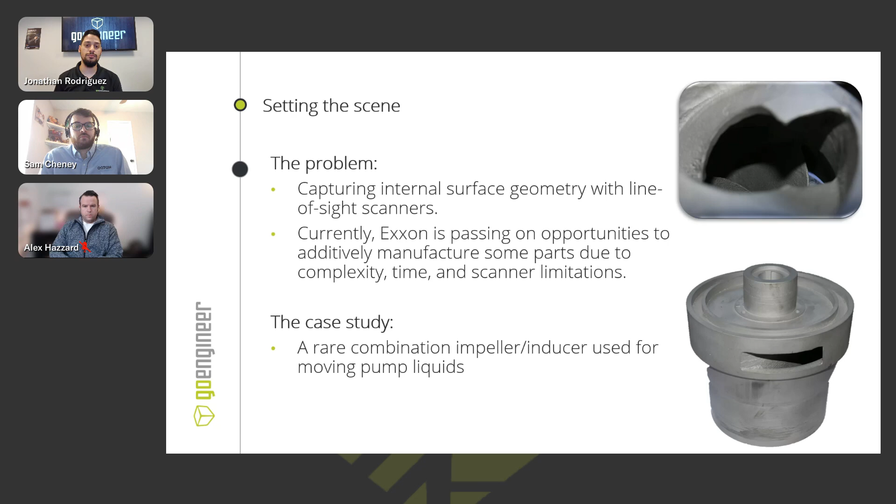Let's see. There we go.

Okay. And as Sam said, there's a few different options for doing something like this. One of them is line of sight scanning. You have a handheld scanner or even something on an arm. It's great for capturing the outer surfaces of the part accurately. You can do it relatively quickly. I think it was probably 30 seconds or so just to scan the outside housing of this, but you're limited to line of sight. So especially with these deep crevices in this impeller/inducer that we couldn't see, we also couldn't scan. The scaling might not have been obvious, but I could barely get my hand in there.

So as we talk about some of the prep work that's involved, this thing is small. There's also possibly using CMM probing. We have a lot of customers that have CMM probes. You still have some of those limitations. It can be a slow process to set up for a part. One of the benefits is if you have the same type of parts, you can set up your program, you can keep running it over and over, and it's great. It does require a bit of skill though. So it's a very accurate solution.

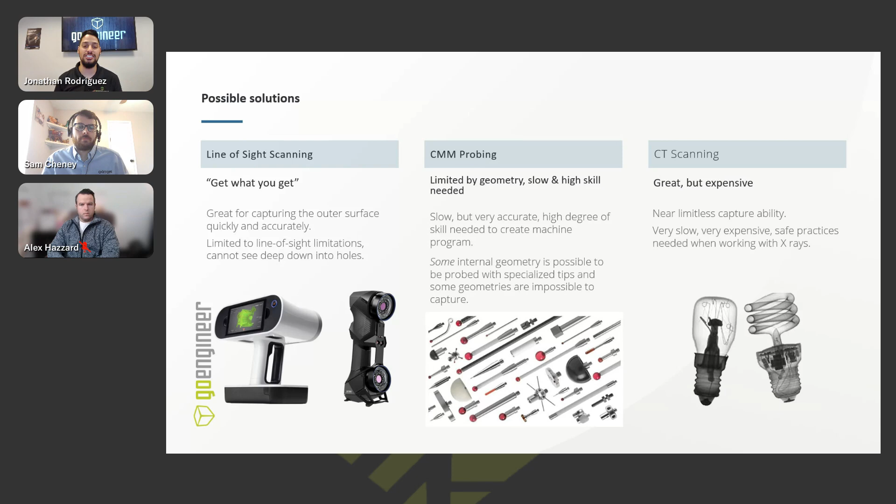There is a degree of skill required, and then the internal geometries are still going to pose an issue. Are we able to get a probe in there? Are we required to get specialized tips to be able to do it? So some of the detail is going to be near impossible to capture. Yeah, while you could do it, these probes are made of ruby last time I checked, so very expensive. Also, no guarantees it will work for the next part that has different internal geometry. So really, it's not a flexible enough solution for us, so that's why it's not the right one.

Yep. And then lastly, CT scanning is a solution that can be great for these types of things, but it is expensive. I don't have one available to me.

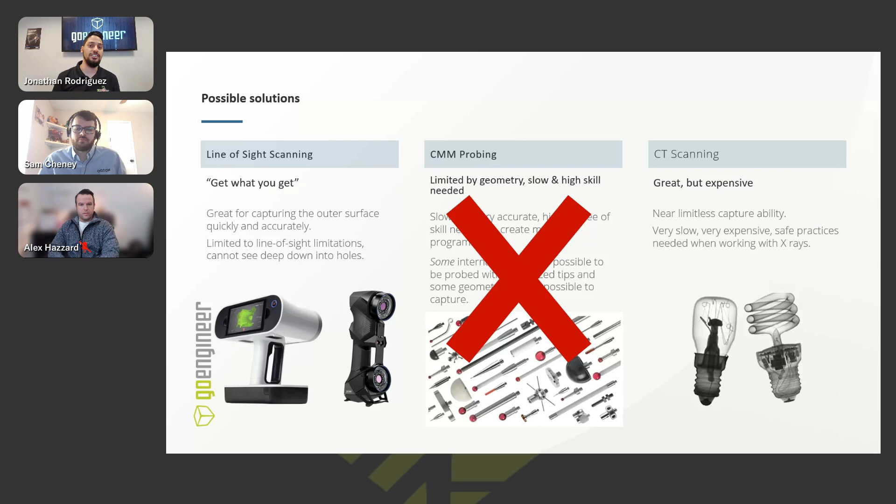Would not be nice. You have a lot of capturability with it, but the expense alone is often enough to turn off our customers or make it really difficult to procure the solution or even just outsource this. It's a slow process. It's expensive. Sam brought up some of the PPE requirements and what you need to do with the room to be able to set this up. So all of that becomes a huge limiting factor.

Yeah, the last possible solution, I was talking to Chris after this, was we could technically section the part, and he said, if you have to, you can section it, but we didn't want to do that. We didn't want to take the easy way out. Obviously, if you have a part that you can destroy by cutting it, then you don't really need to silicone mold it. We're doing this the hard way to hopefully show you how to do it so you can learn from our mistakes, successes, and copy this workflow if you have internal geometry that you can't just hack into. Yeah. If you can cut it, save yourself the headache. Yeah, right. Join us on our journey.

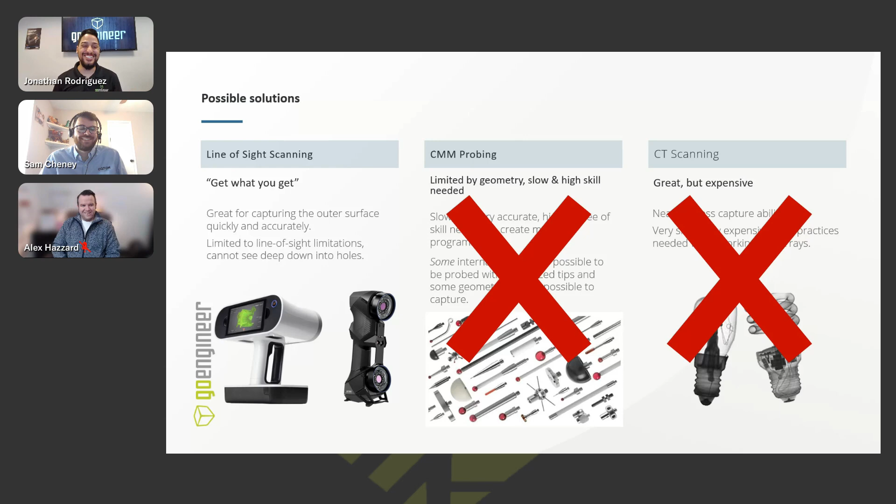So, Sam, this was a great slide that you helped put together when talking with Chris. So what was that conversation? Yes. So I spoke to Chris when we were getting this project started. I wanted to know why; he is the driving force behind this. And he told me a little story. He pulled a bunch of these impeller parts and looked at those 8 in total that they wanted to use for this digital ecosystem, this reverse engineering project. And out of those 8, only 4 of them were able to be successfully scanned with his scanning equipment. The rest had this internal geometry hurdle; you can't get down in there. You can't see what's going on inside it. So 50% of the parts he took aren't even able to be candidates for this digital ecosystem project.

This project is going to be a very large initiative. It's essentially replacing an entire warehouse with a server of digital parts that you can just click on demand and start manufacturing whenever you're ready. This is going to take 6 to 7 engineers per site. And they are going to spend at least 25% of their time, a quarter of their week, scanning, modeling, creating this digital ecosystem to reduce the physical inventory. But if 50% of the parts can't actually be captured, that's leaving a lot of spare parts in inventory, and it's leaving money on the table. So that's why we want to use this silicone molding technique to really get the most out of the scanners, where they potentially haven't been taken before.

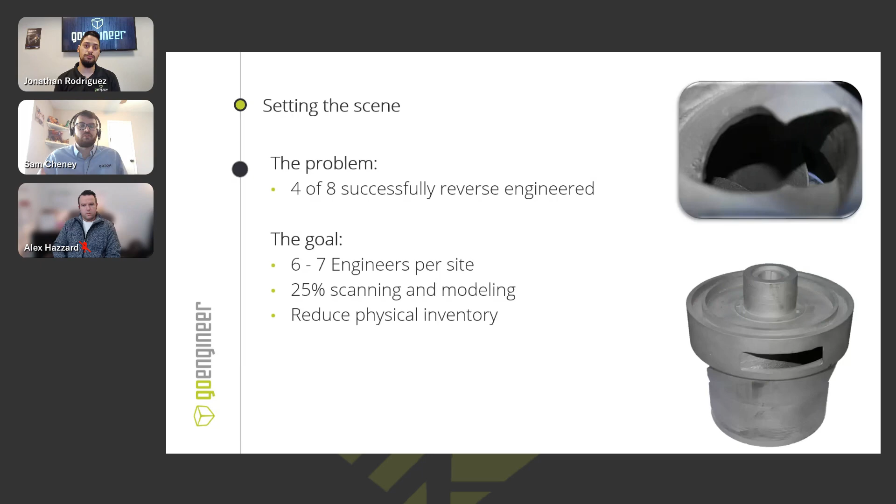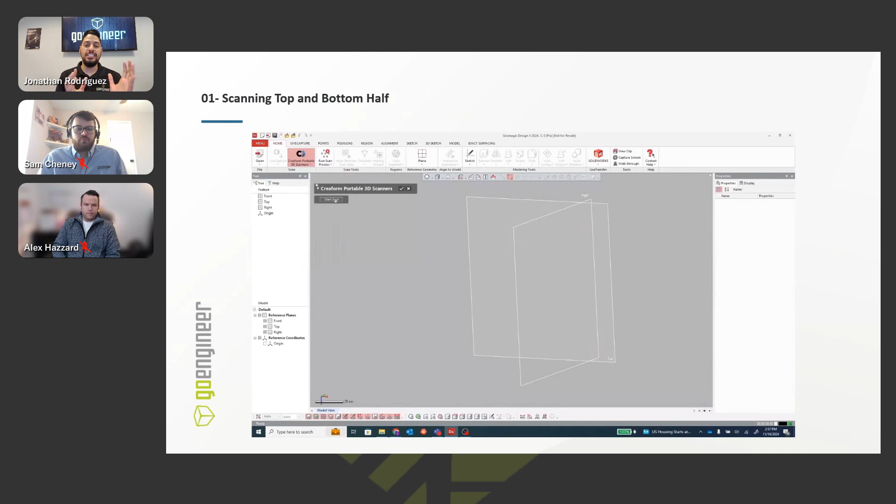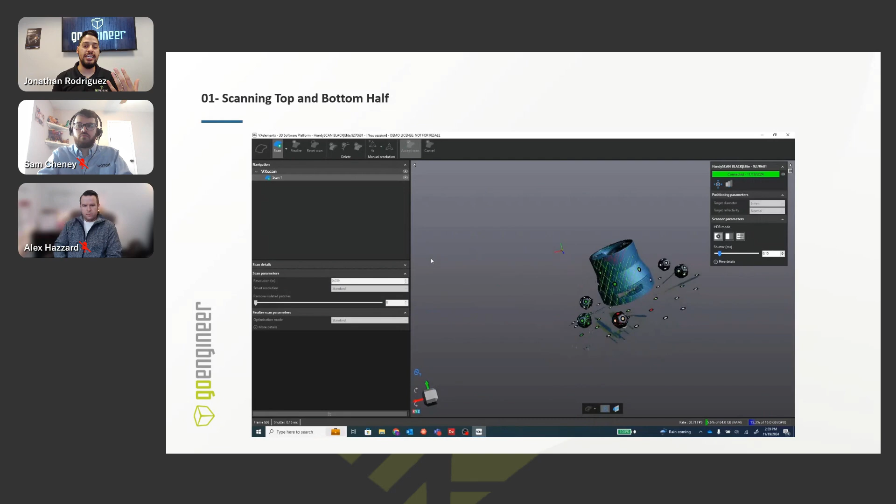So let's talk a little bit about the 3D scanning process. In this case, we needed to 3D scan as much as we could. So my goal was to capture the outside housing, which was pretty easy to do, capture top and bottom, make sure I have all of the geometry I need. In this case, there's a ton of different solutions out in the market. I recommend evaluating all of them, see what works best.

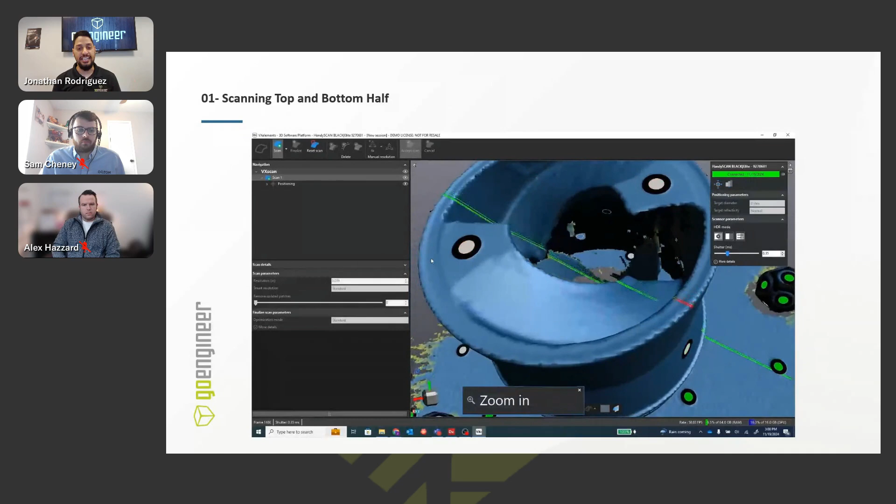In this case, I went with a blue laser system. One, I'm trying to create a repeatable process, something I can copy and paste and do over and over. So using a blue laser scanner allows me the flexibility to deal with chrome parts, shiny if they're polished and things like that. So surface finish doesn't necessarily matter too much as long as it's not translucent.

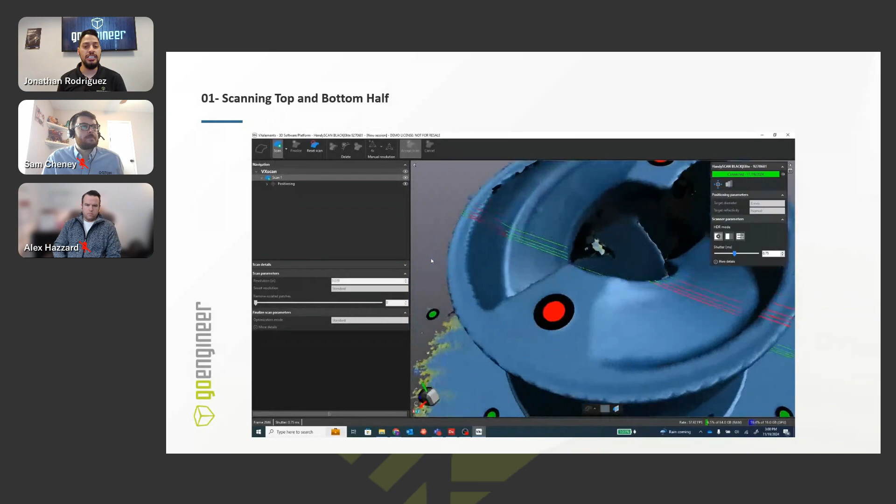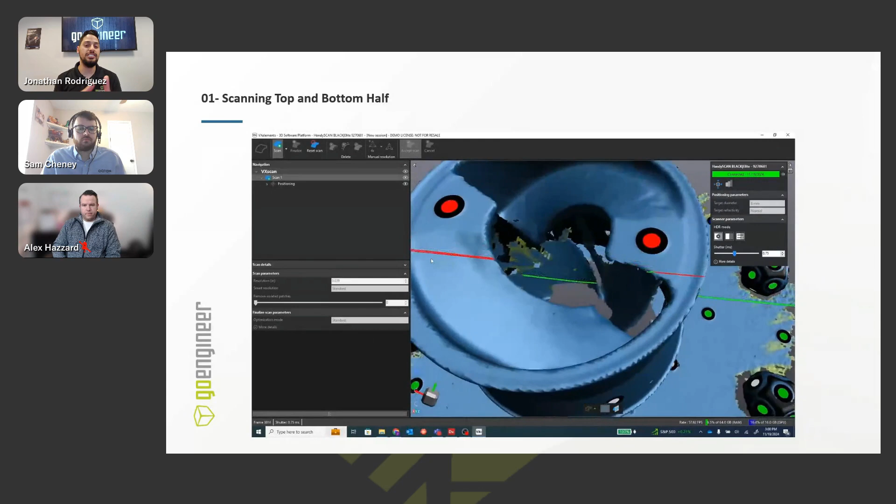The other key benefit is actually here on screen. The blue laser systems have a single laser mode. What this allows you to do is actually get deeper into pockets that you can't normally capture. Again, I can't get my hand in there, which means the scanner is definitely not going to fit. But we are aligning this mold we're going to create to this impeller. So getting as much internal geometry as I can capture is going to make Sam's job later on when he goes to reverse engineer it a lot easier.

And I want to be cognizant of that because this whole process hinges on me getting this aligned, getting the top and bottom aligned, getting the mold I create aligned to it, and then starting to reverse engineer it. So if we fail at this step, we're dead in the water. This is very crucial. So having a system like that makes it a lot easier.

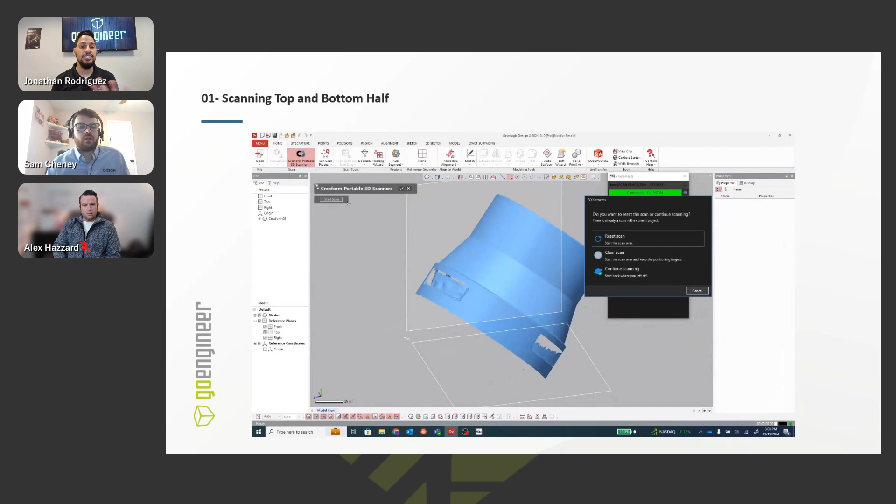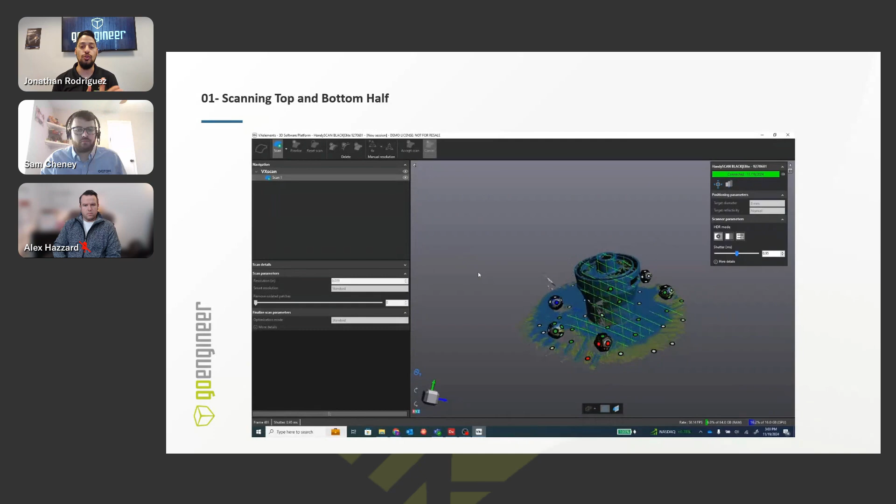The other thing I wanted to keep in mind was we don't really have a lot of registering features that tell us where we're facing in space. So aligning the top and bottom is quite difficult. So using these targets is actually what allowed us to do some of that, to be able to align based off of the targets, as well as some of the very few registration features. Yes, and really with the scan of the outside, overlap, overlap, overlap. I can't stress that enough.

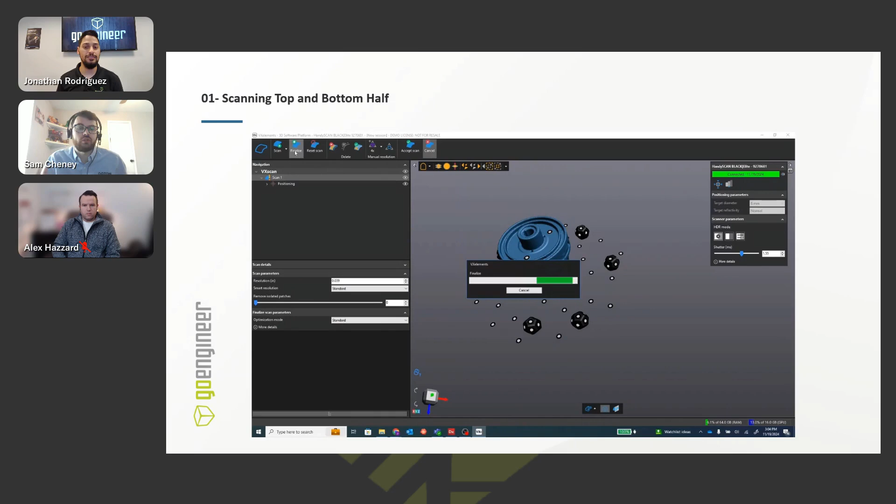Even though we can't get all the way down inside, we need at least a little bit so we can have a clue what we're doing when we try and mate the silicone mold together. So Jonathan did a great job getting the scan of the outside, and when we get into the silicone molding, you'll see how great of a job he did there as well. But yeah, overlap and alignment, I can't stress those things enough, are really key factors that we found to be pivotal to this workflow.

Okay, so once we've scanned the part, you can see we scanned it directly into Design X. What are we going to do with the scan data? This all depends on your workflow, and obviously for us, we took it all the way to the end of the line and made a parametric model. But with your scanning, you'll either have raw point cloud data or triangulated mesh. Depending on the scanner, it might triangulate it for you, and if not, you can triangulate it inside Design X.

Now, if you're just scanning for inspection, you have the CAD model and you want to align them, you can stop. Use the mainly raw data, maybe run the healing wizard or something, but you don't really have to do too much mesh editing. Now, if you're 3D printing, hopefully you've checked out GoEngineer's YouTube, our YouTube. There's a ton of information about getting parts ready for 3D printing, and one of them is to watertight the mesh or fill all the holes. Again, if you need that, you edit the mesh, you're done.

The longest and most complicated workflow is to make a parametric model, or make a model that you can actually go and make a drawing from, make manufacturing files. It's make CAD from the scan data. It's normally what people want, and they want a one-click easy button. And while Design X has some tools to make that faster, there's no one-click easy button right now. So that is the process that we're working through during the reverse engineering process.

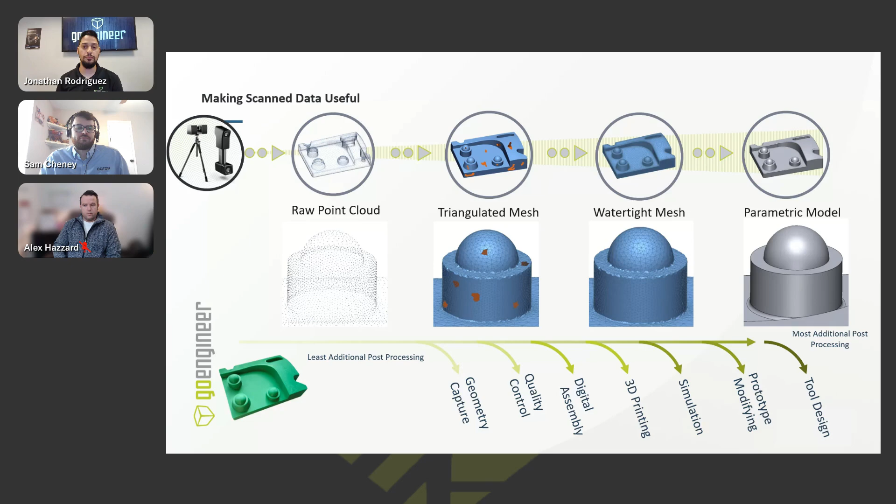All right, so the silicone molding process. This was the next step after we scanned the outside, scanned as much inside as we could. This is the part I had no knowledge on, so I can't stress enough how much I appreciate Alex's and his team's help on this part of it. But the most important thing is prep. Get this right, spend a little bit of extra time.

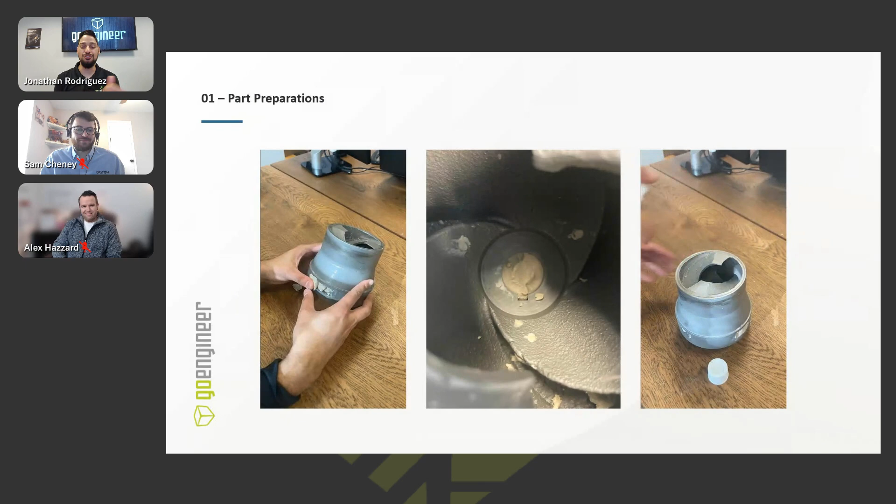The other thing is, if you look in the center, this is not a smooth part. And it's not just something where I'm pulling the silicone mold out. It's also a case where I have to twist it out too, right? I have these vanes in the bottom that are trapping it. So this was something that was really difficult to overcome.

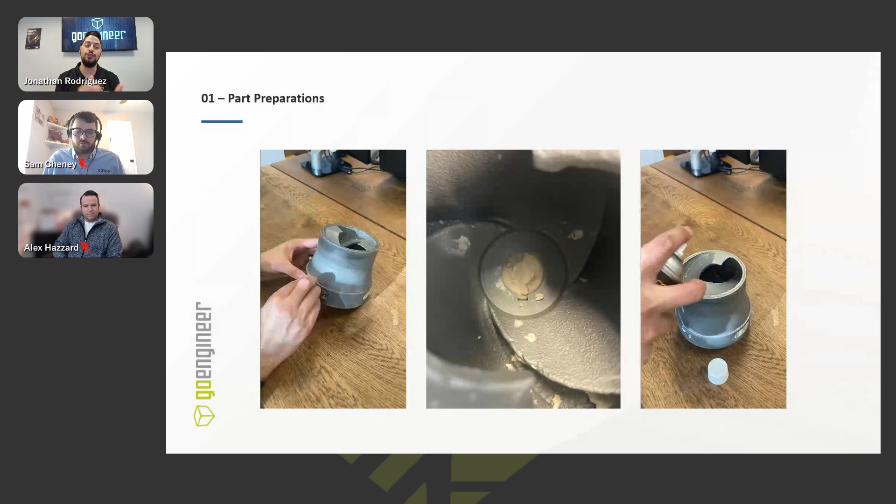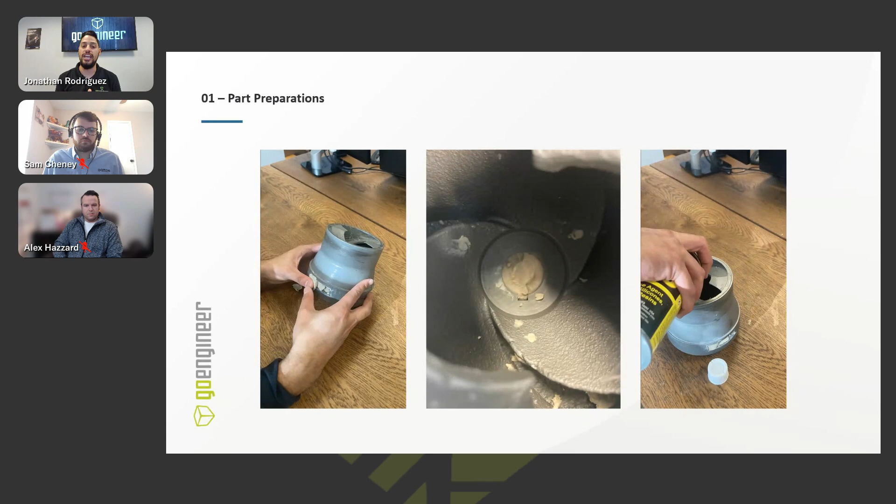Another aspect of it was there's these 3 through holes on the vanes. So in twisting and pulling out the silicone mold, I had to be cognizant of the fact that if I get silicone in those holes, now I'm fighting against my ability to twist it out. I already have this rough surface that I'm contending with, but in addition, I would also have this extra silicone in pockets that I can't quite access or get out. So I wanted to fill this center outlet as well.

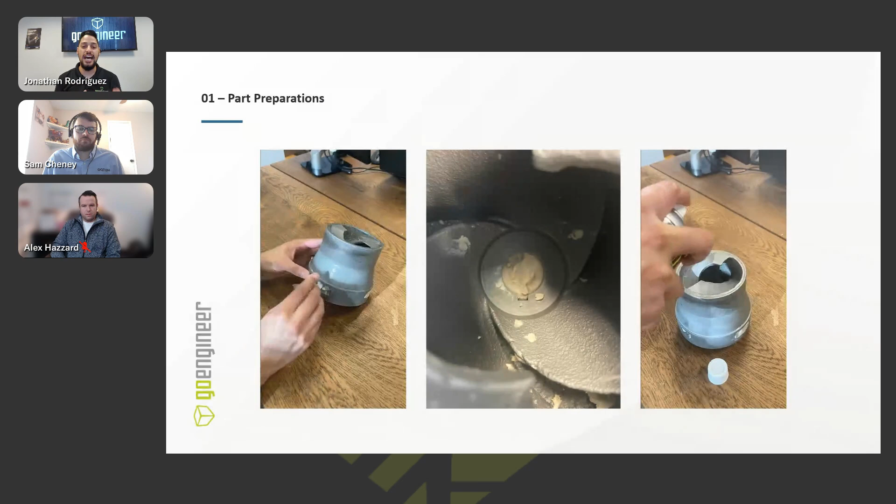I wanted to leave enough of this keyway for me to grab in the silicone mold, because that's a registration feature. That's a feature that I could use to align. Exactly. Align this silicone mold to the actual part. Actually, I should say Sam did that part, but I was keeping in mind what he would have to contend with there.

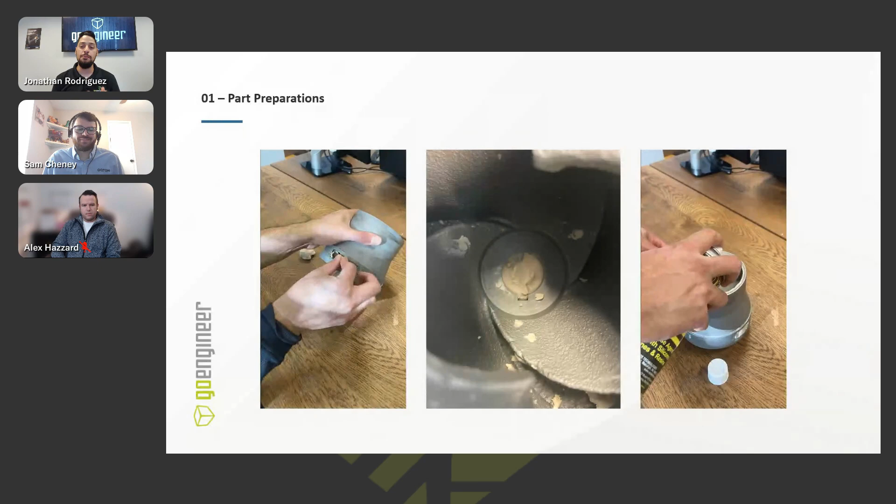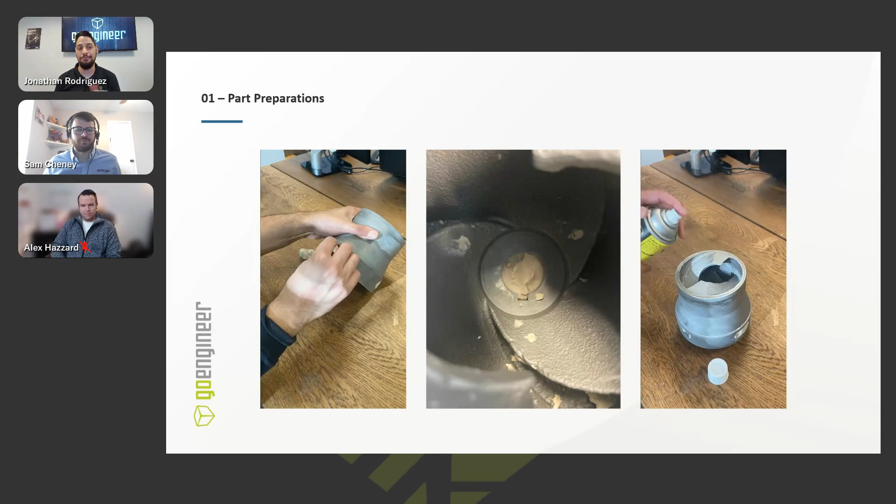And then the last thing is, while these materials did not require mold release, again, I was already running into quite the challenge. So I wanted to use mold release because it doesn't hurt me. It can only benefit me. So in this case, I used a little bit. I had to be thoughtful about the distance because there were pockets I couldn't get mold release in. So one of the strategies I tried was I just sealed it up, sprayed inside, and let the vapor settle as I rotated the part. So that's another key piece to it. Just overspray. Nice. Yes, exactly.

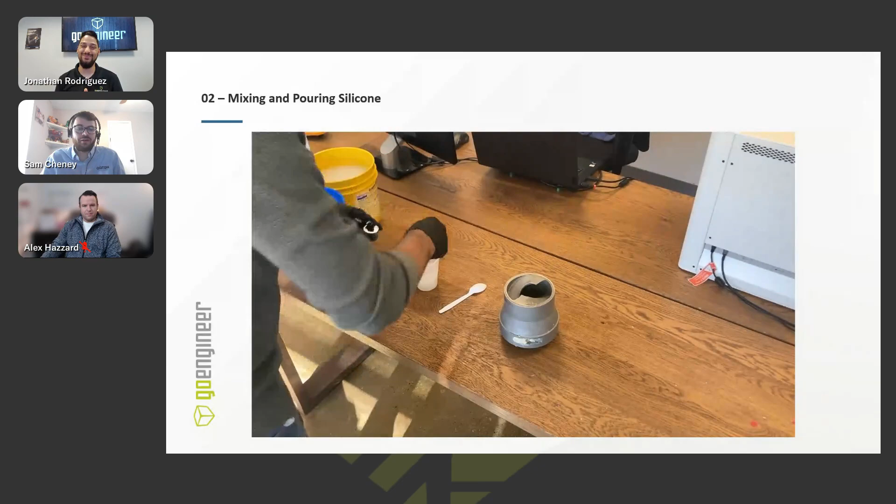Well, you use mold release all the time for scanning. If you have a shiny part, you can use it to dull that surface down. I know you use a lot of it for that application, but finally you're using mold release for molding. So finally you get to use all of that spray that you have. My first time using mold release for its intended purpose.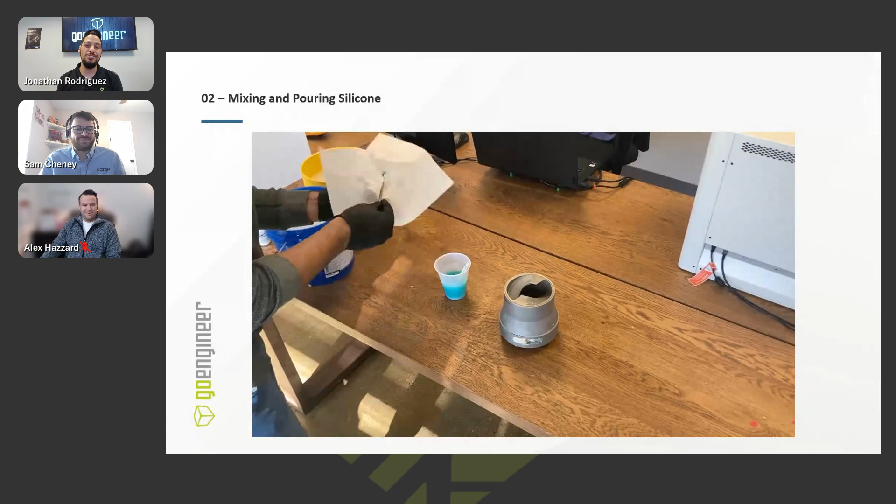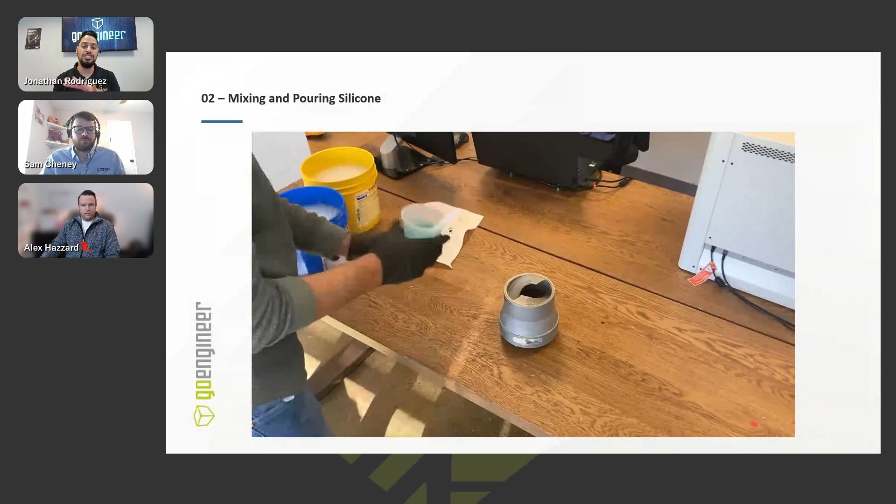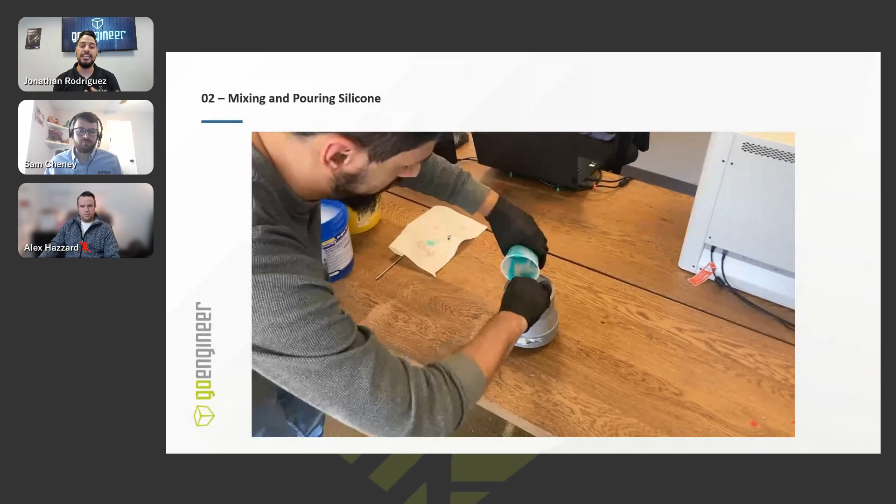Right. So this material is called Dragon Skin. One of the things I was contending with was it's very low viscosity. So it was just draining out of the part. It did not go on any of the surfaces I wanted. So I added some thickener just to increase the viscosity. The other thing is it's translucent. So while it's not glass-like, it is something that the scanning lasers can go through and penetrate. So I made sure to add some tint just to give it some opacity.

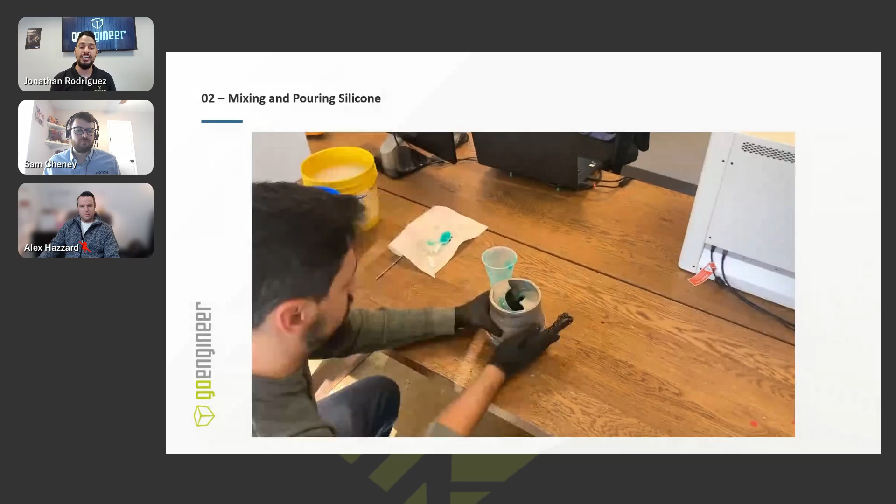The other thing I did was, because it was a little higher viscosity once I thickened it, I actually leave myself a little bit of extra silicone to, with my hand, spread it on some of those undercuts and those sidewalls, because that's going to be crucial to capture as much of that as possible, because we can't see it in the scan data.

So, Jonathan, I'm new to silicone molding myself as well. I have no idea what I'm doing with it. It looks like you got 2 buckets of goo, you mix it together, add some color to help with the scanning. That all makes sense. You're wearing gloves. Looks like you're indoors. What kind of environmental or PPE requirements? How toxic is this?

Is it like working with 3D printing resins or powder, or is it less than that? Yeah, it's less than that. So with 3D printing powders, your concern is with it aerosolizing, getting up in the air, inhaling it. With resins, you can build an allergy to it. In addition, it is UV curing, and some resins are 1 part, some are 2 parts. So as soon as it's hitting the table or just being dispensed, it's curing.

And you almost have to chisel it off tables afterwards. So you don't want that on your skin. You don't want to breathe that stuff. In this case, with a silicone, it was pretty thick, so I didn't have much concern with it splashing. But if you're using something lower viscosity, eye protection. I use gloves because, again, it was quite a mess. So I wanted to be able to dispose of those gloves, put on a new pair, and use them.

You want to have good airflow in the room. So this room is a small medium conference room, but it actually opens up into a larger room, and the HVAC's connected, so I had a lot of airflow. And then another consideration that I was contending with was just keeping a tidy space. The other thing I learned in my research was that latex gloves can actually inhibit the curing process. So that's an Alex question for later, but it can inhibit the process. So I was using nitrile gloves, latex free, something that wasn't going to affect my process downstream.

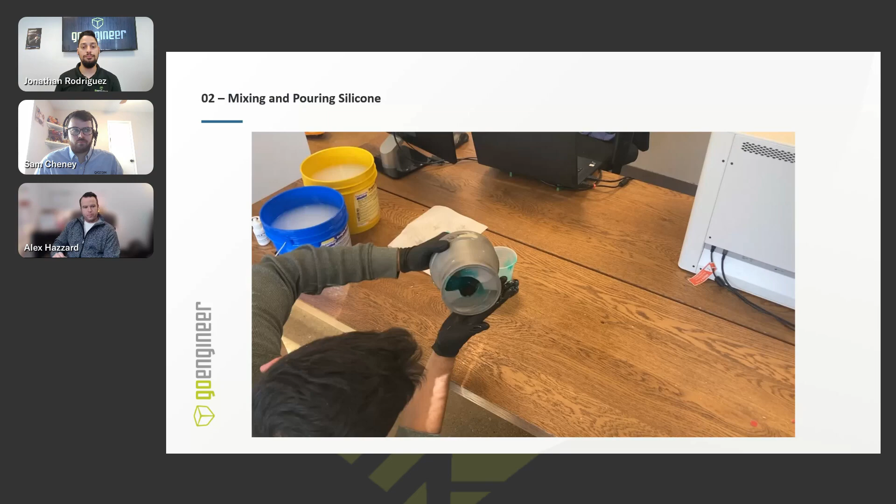Just make sure you look at, and with all of our materials, there's a technical bulletin. It has the mix ratio. You want to make sure you thoroughly mix the same ratio of the A and the B that it says, because if you don't, it'll cause that to not cure as well. Yeah, and this one was 1-to-1, which was quite nice. It made it easy. Here is a montage of me struggling.

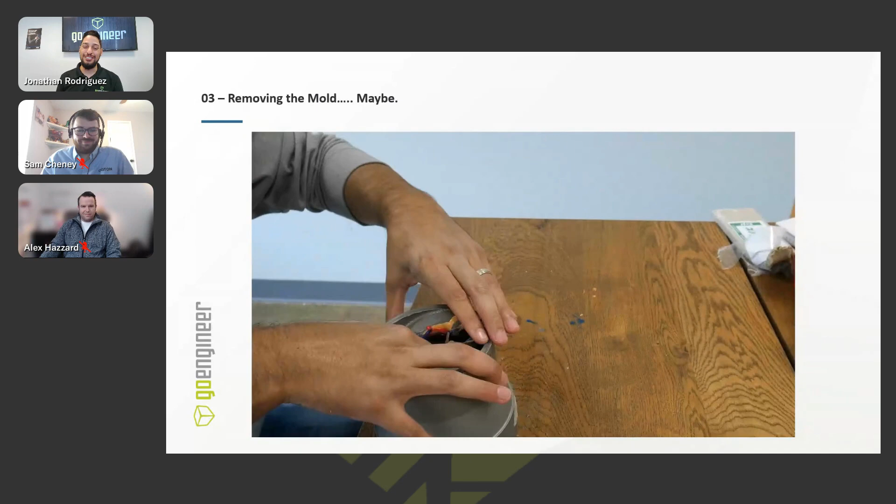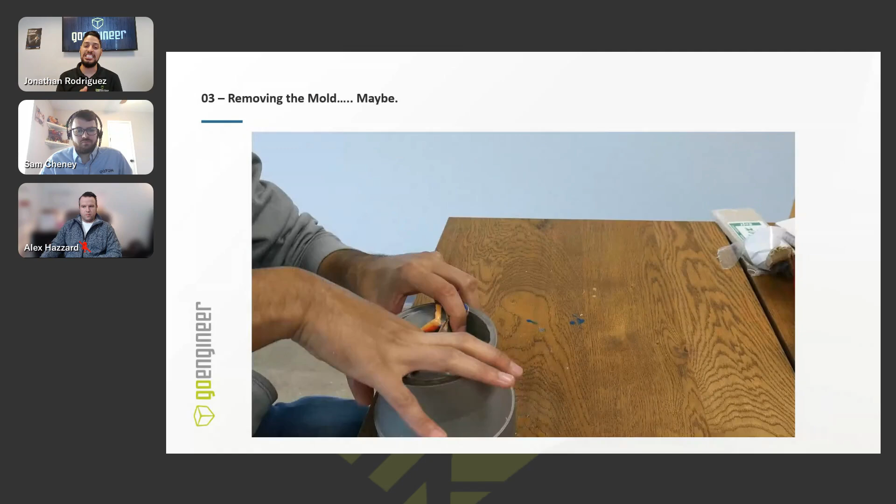So this was my very first attempt, and we wanted to show this because there's a few things to call out. One, it took me a little too long to realize that if I remove the clay or the wax from the bottom and just run a flathead or a tool in there, I could actually push the mold through and up while peeling it out. And so that's actually what I did with every single mold after this one.

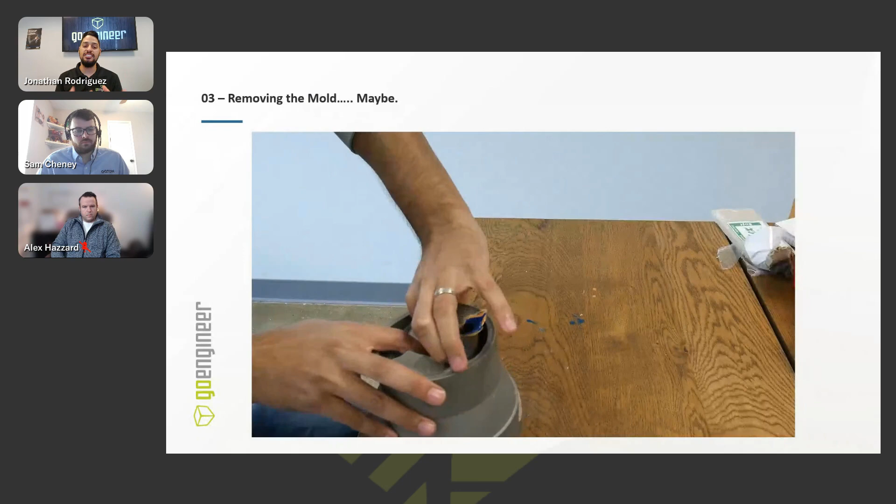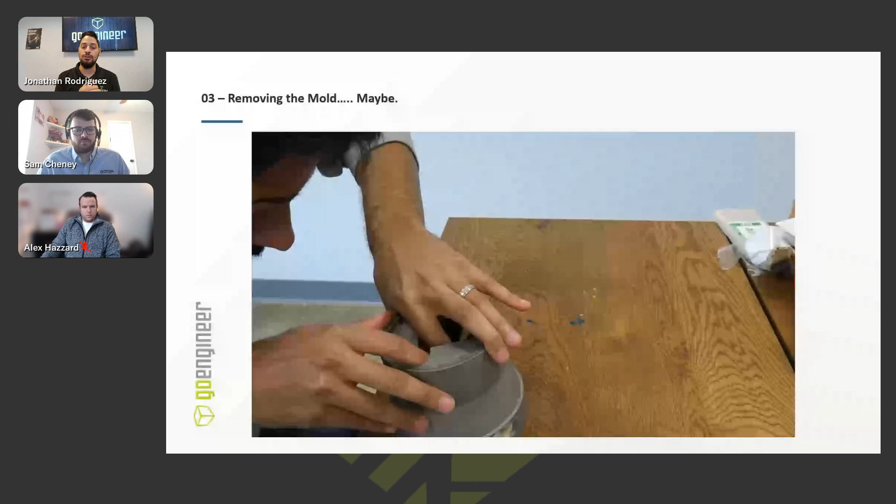The second thing was this specific material recommends 4 coatings. The challenge is making something that is stiff enough that when I have it on the table and I'm scanning, it's not warping under gravity and causing deviations, but also still soft enough that I could fold this inward, twist, and kind of pull it out. So that was something to contend with. I coated with different colors because I want to make sure I have sufficient coating all over the thing.

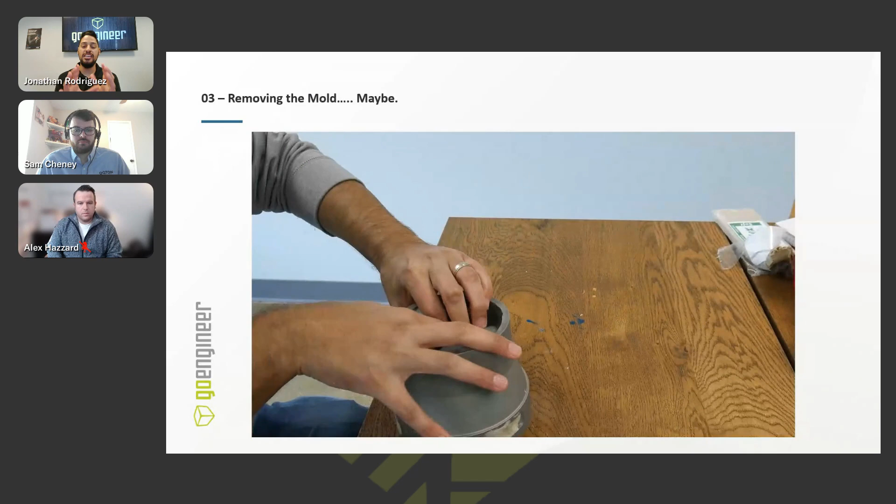And the other part of it was Sam has not seen this part in person. He's reverse engineering completely off of pictures, off of what I say to be true. So making one coating our special color meant that when we go to look at the mold, it's okay, what part of the mold is touching the actual part and measuring it, and what is just extra overpour.

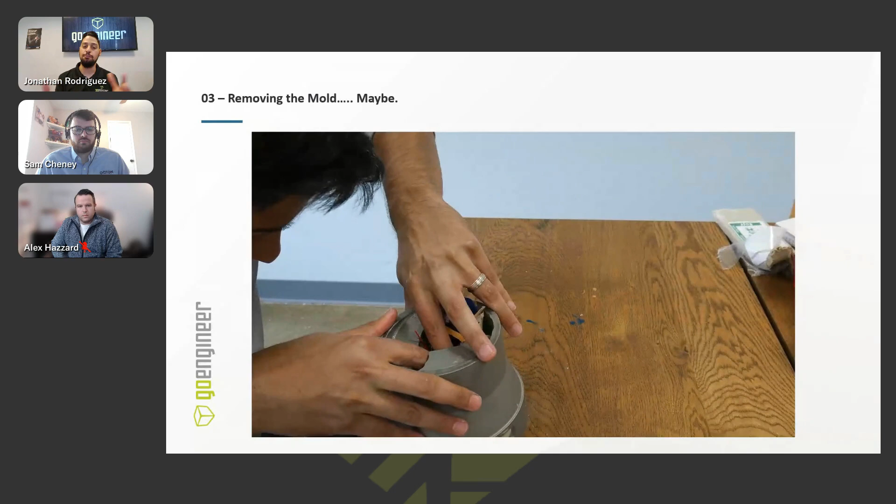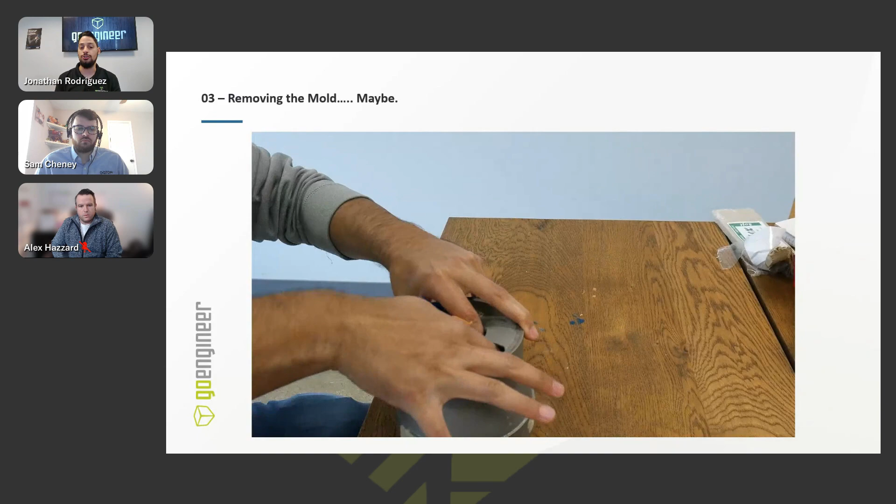So we had our designated color that we're using as reference. So if I saw one surface in gray and another surface in gray, I knew the impeller we were trying to capture was in between those two, because that was what was poured directly on it.

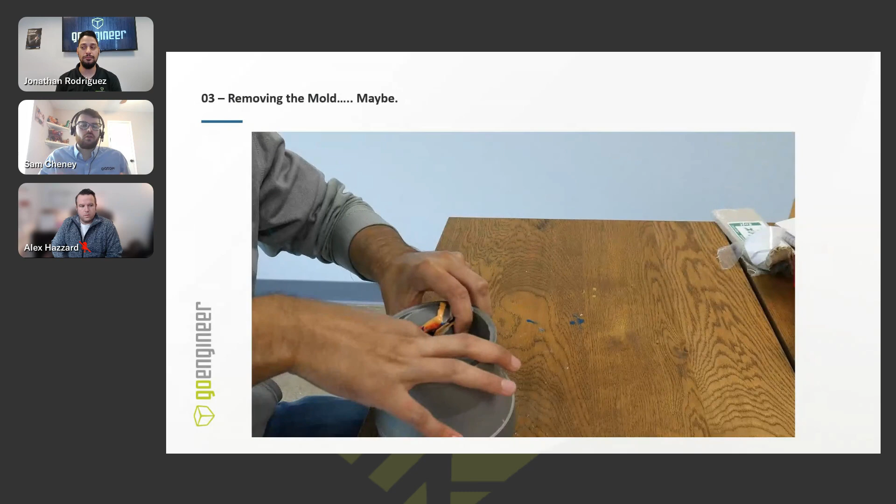Yeah, so those areas where Jonathan and I have to jump on a Teams call and be like, oh, there's this piece on the silicone and it looks like a critical feature. It could be a bit of overpour or a bit of spillage. I don't know. Do I need to model this in?

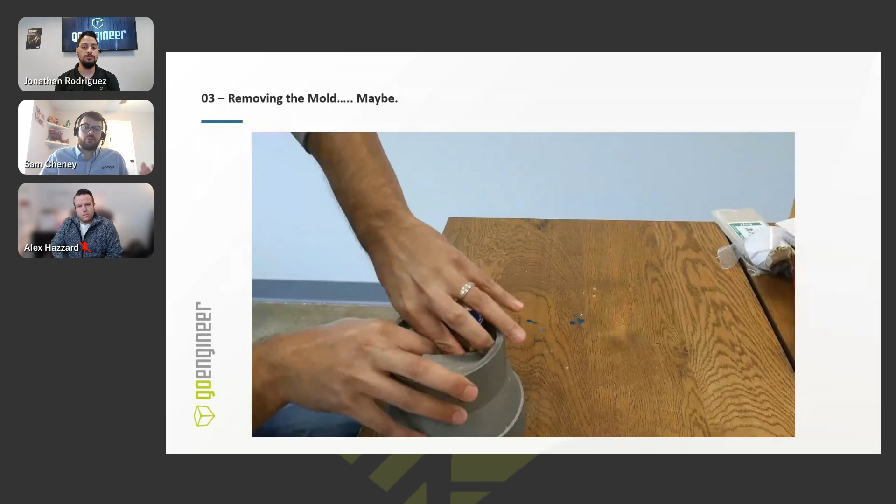And Jonathan can quickly check the mold and be like, oh, that is red. That's not gray. So that is actually the second coat. That's not a critical feature. That's not touching the actual part. That's just essentially the silicone mold that can be ignored.

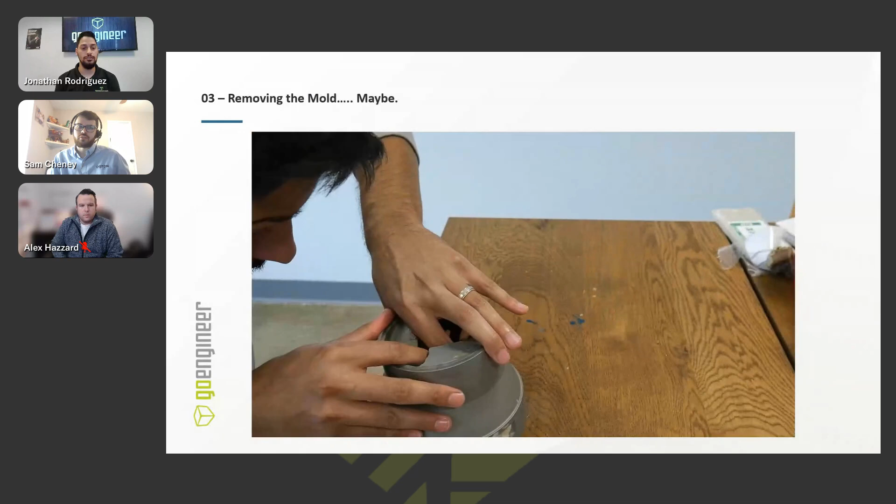So having all those colors, I think, was honestly one of those quick tips that we want to share with you guys, because it's not something that I would have thought of, but clearly, Jonathan doing it definitely helped the downstream application.

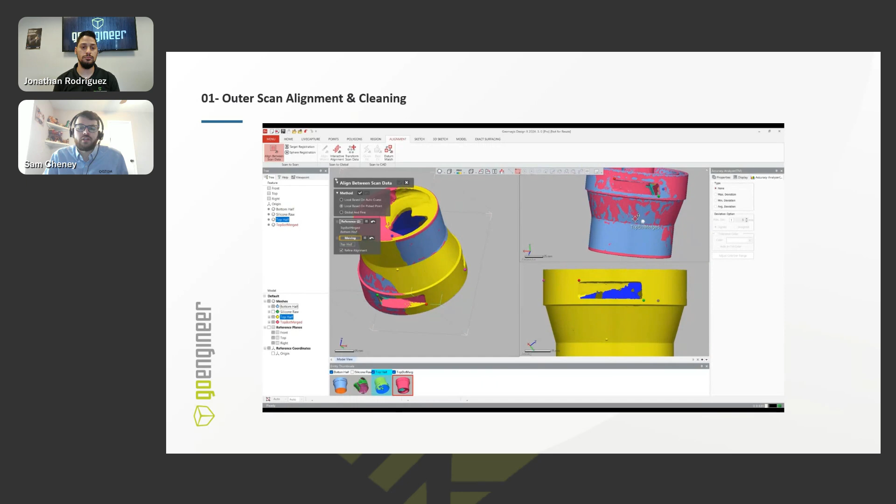The first one was obviously Jonathan scanned this part into Design X using the live capture tool. But then I had to align all of these scan data together, at least the outside scans. I did some of the pretty automated workflows, like picking points that are the same on scan 1 to scan 2, and then have it automatically best fit. And you can see doing this process is fairly painless, just picking 3 points from one scan to the next, hitting align, and then running the healing wizard to tighten everything up and clean up any irregularities.

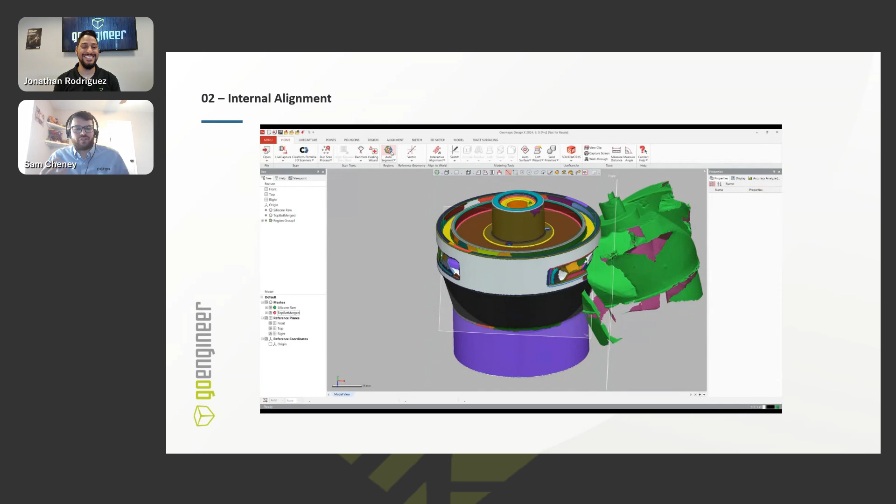And then once that was done, I merged this together, so I had one scan of the outside. Pretty painless. It's a very familiar workflow with most people. Now, aligning the other part, the inside, definitely required a little bit more finagling. I first had the scan of the outside, and then I did an automatic regioning.

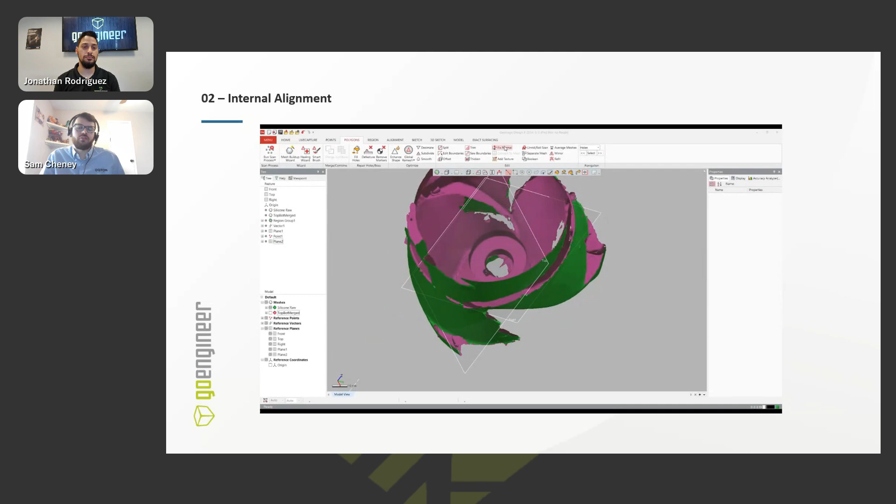So in Design X, I can pre-select and analyze the mesh, and any flat areas come in as a plane region. Any cylinder areas, a cylinder region. Same with cones, freeform. All of these different surfaces and selections are identified as a colorful splodge or a region. I did this for both the internal and the external scan.

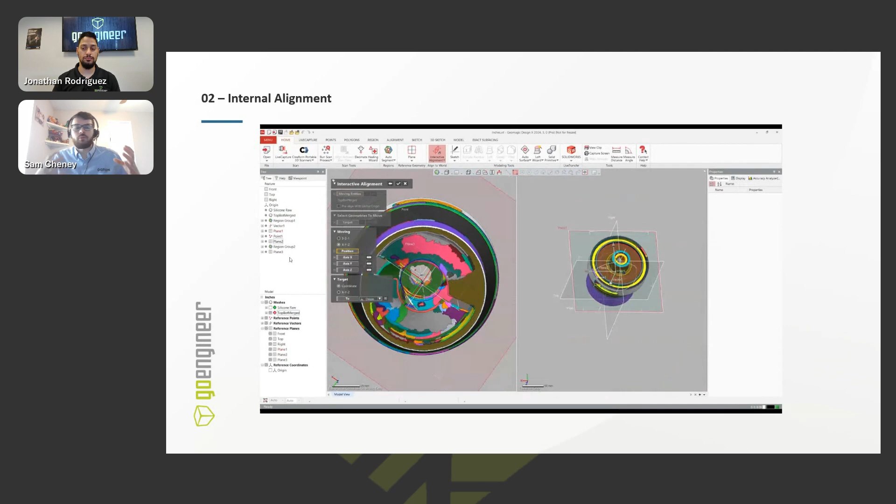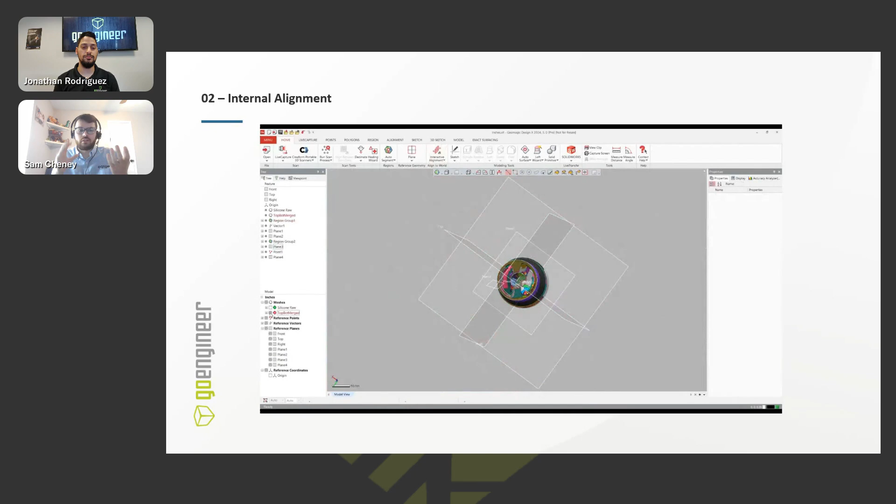And the reason I'm not doing it the way you saw in the last slide is because the scan of the silicone is essentially like, if you've ever held a book up to a mirror and tried to read it, everything's upside down and backwards. And this is the same case for the silicone. You know, the inside surface of the silicone is actually the outside surface of the mold, and it was very confusing.

The way I aligned all this is by picking a datum, or picking where I wanted my coordinate system to be. For me, I used the keyway and the alignment feature at the bottom. I created a reference vector or central axis, some planes, and some other alignment features on both scans. I then put them both in the same coordinate system and then ran a best fit to get it all tight and neatened up.

I didn't actually combine both scans, although I could. I kept them separate, mainly because when I'm working on the inside, I don't want the outside to get in the way of my workflow. I could do view clips and things like that, but just being able to turn things on and off made the workflow a little bit faster. So that was the alignment.

Next up. Oh, sorry. Go ahead. I was going to say a quick note on this is that one of the crucial pieces is I could scan almost the top of the vane, but I couldn't scan the bottom of it. So the top surface you're seeing of the silicone mold is actually junk. It's just the fourth layer of silicone.

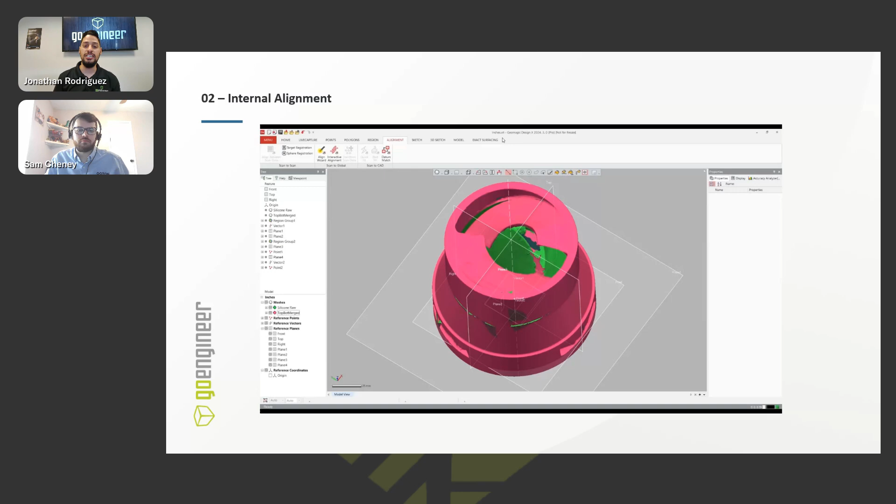It's actually the bottom surface of this that correlates either with the top surface of the vein or an internal surface of it that correlates with the bottom. And the part that Sam needed crucially was the bottom face of that vein, which was captured by the silicone. So that's why keeping it separate was crucial here.

Yeah, we definitely had a few arguments over Teams about, you know, what am I looking at? Like, send me a picture of this one specific area.

But anyway, the first feature I like to do in any reverse engineering process is the one that describes the biggest amount of surface area of the part. So for this, it was the external revolution feature. This was a pretty quick process. Honestly, it didn't take too long at all because I used the revolution wizard in Design X Pro.

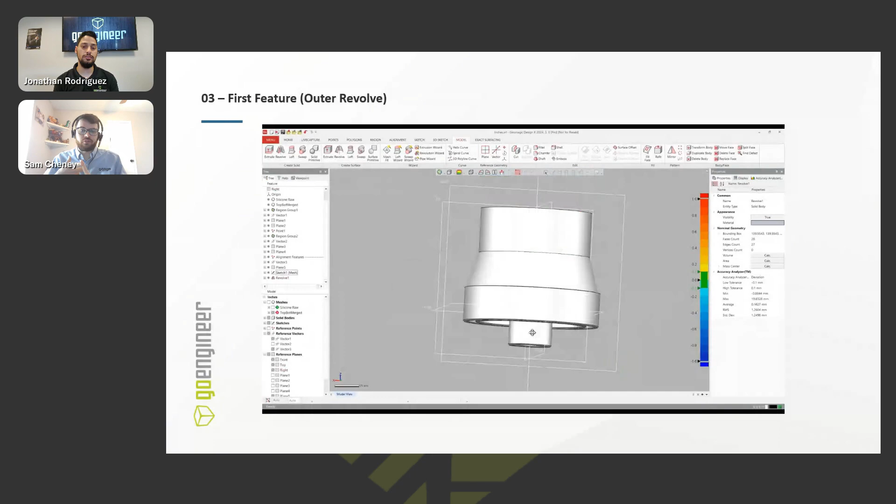I did this because essentially it's almost like a Clippy. If you remember way back to the dawn of the internet, it's like, hey, I recognize you need to do a revolution. I just select the regions that I want it to make the revolution. It then does the sketching for me. It does the solid body operation to revolve, and it gives me an object.

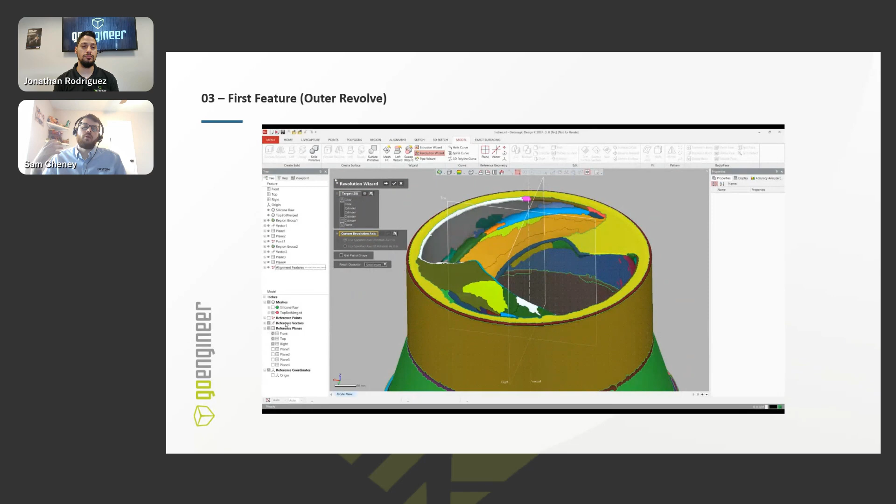Now, is it perfect? No. It got me, I'd probably say 85% of the way there, and the remaining 15% I just had to make the sketch idealized. Again, I'm the engineer. I'm the one in control of it, so I'm not taking just what the auto sketch gives me at face value. I'm adding my own constraints.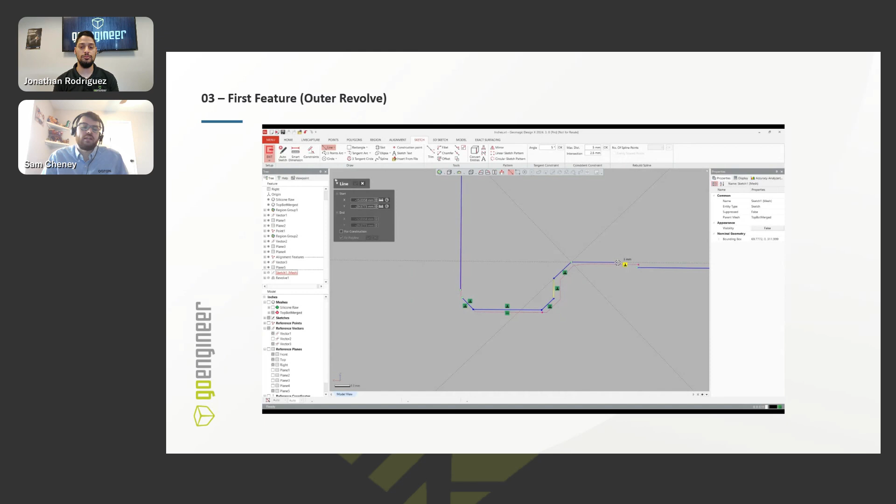I'm making things parallel and vertical and adding all of these kind of idealized perfect sections to the sketch so that it's easily editable, easily reproducible, and easily manufacturable. So that was the first sketch or the first feature.

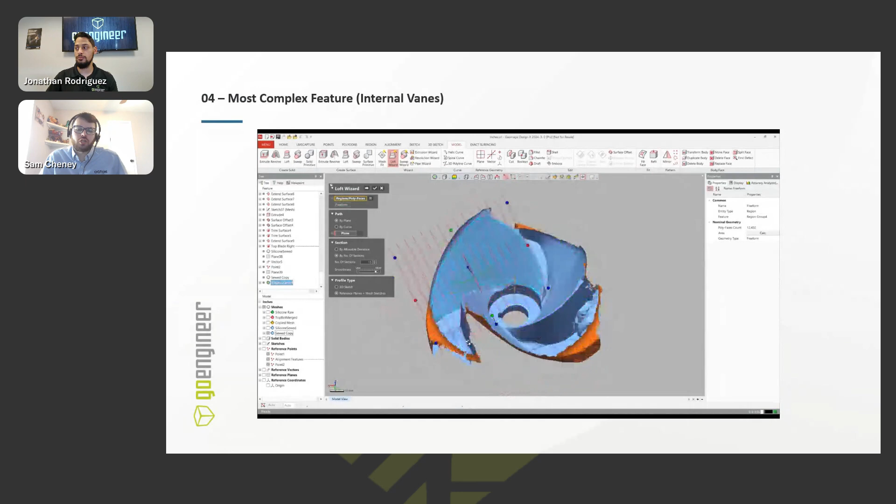The next feature I'm highlighting is the most complex, and that was the inside captured geometry, where I'm utilizing the silicone scan that Jonathan made. I'm going about this using surface modeling techniques, and I'm essentially capturing all of these surfaces that were silicone and creating lofted surfaces to capture the surface very accurately.

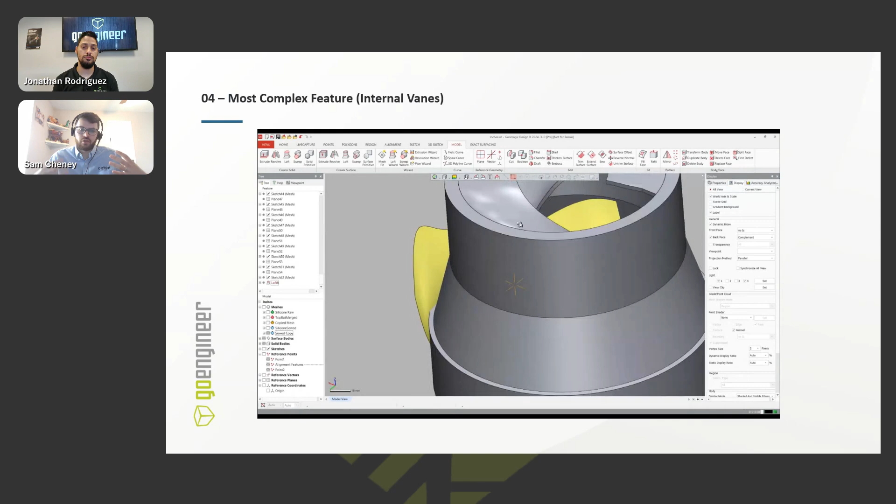You can see here I'm verifying each step of the process is accurate by turning on the accuracy analyzer, so I can see a heat map of where the deviations are, if it's in tolerance, out of tolerance, or if I'm on the right track. Now, I'm taking the results from the accuracy analyzer with a grain of salt, because at the end of the day, it's a silicone.

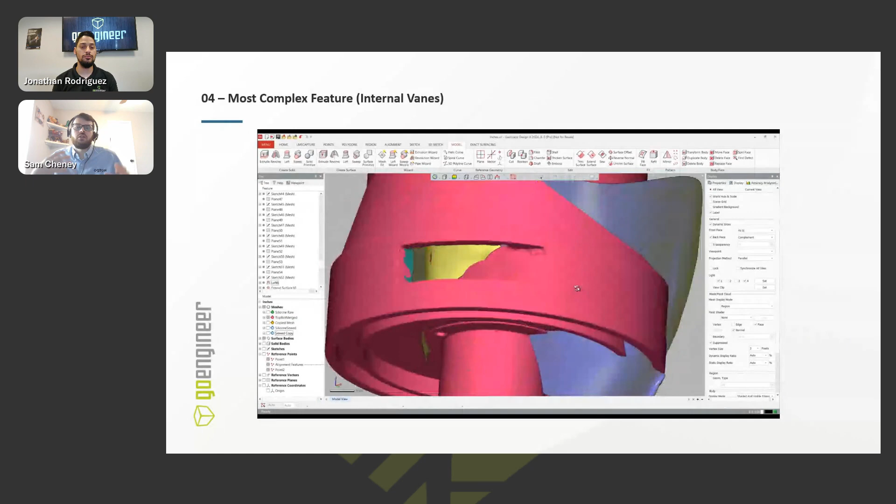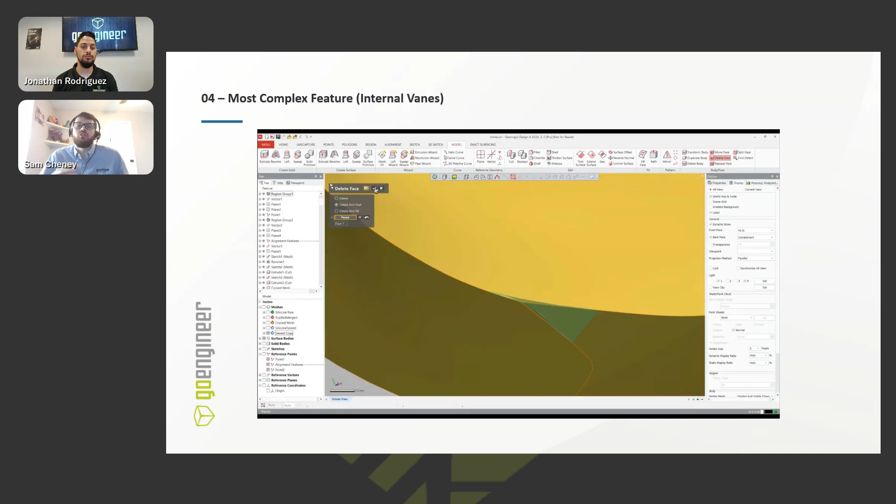The silicone might have warped, or we might have a bit of scan data that is the second layer. So I'm essentially using the information Jonathan's giving me, as well as the scan data that I'm seeing in Design X, to create this blended result where I'm idealizing it, making surfaces neat and tidy. And once I've made surfaces on all of the faces of this vane, I'm then trimming it all together, trying to neaten and tidy it up.

And you'll see here, once I've finished this trimming of the surface, I have to do every single side, not just three sides. I've got to do the back side as well, where it meets up with the rest of the object. So trimming all of that together, I then essentially make it into one solid body of just the vane.

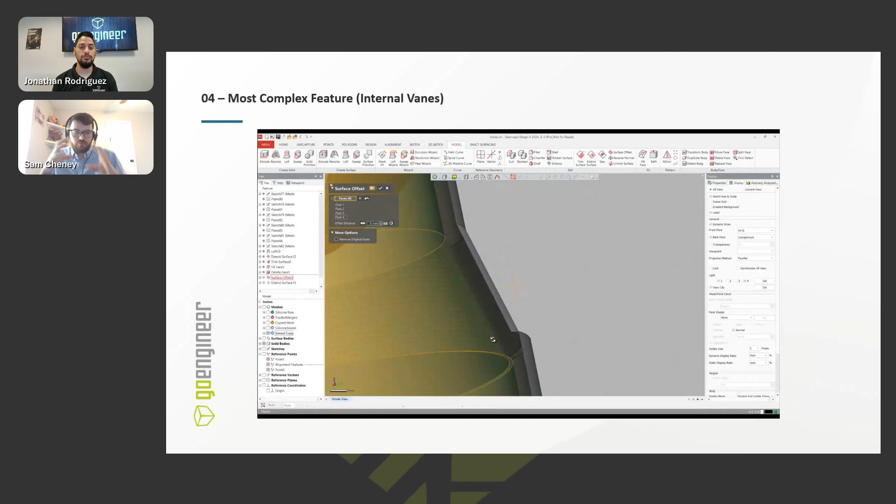And sure, I could then do the exact same process again for the next vane, if I wanted the model to be as scanned. Now, I'm trying to do this a little bit more with engineering thought. So I'm going to idealize it and use the pattern feature.

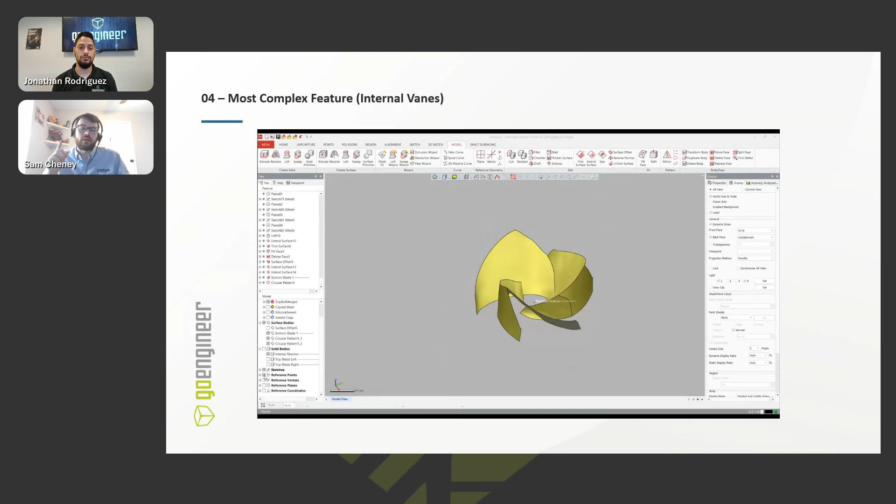So I'm making one vane that I'm happy with, and then I'm going to pattern it around 3 times to then give me the final model. And all the while I am checking the accuracy analyzer, making sure that the sketches, and you can see here on the left as well, I have a full feature tree. So I can go back and edit a particular feature if I need to.

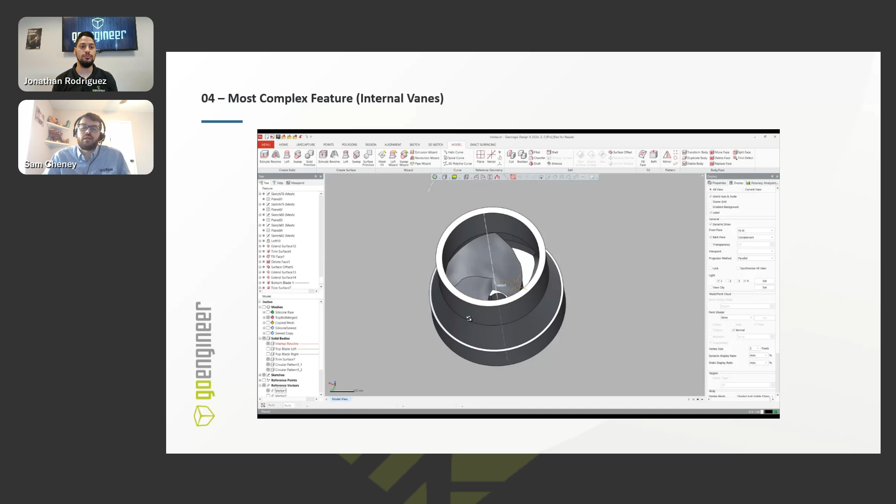And also, when I'm finished, I can live transfer the whole thing over to SolidWorks, Inventor, whatever major CAD package I'm using. So it'll build the feature tree that I've made in Design X in my native CAD system as well. So, Jonathan, if you hit the next stage, you can see the results, the fruit of my labor, probably about seven hours worth of reverse engineering.

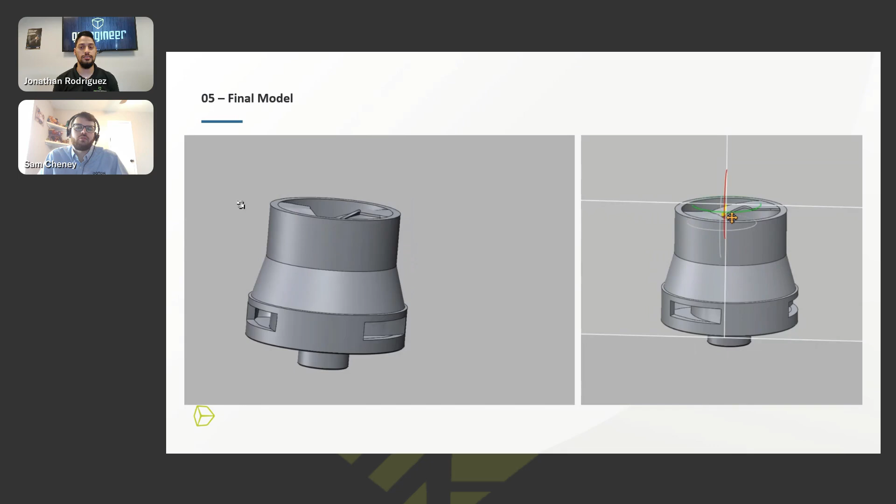I did have to start again, because I kind of overlooked the alignment step. I rushed through it, thought I've done 100 reverse engineering parts before, I don't need to really take the time to get the alignment right. I skipped over it, started reverse engineering, did a few features, and then realized that actually these 2 scans aren't aligned. I don't like it. I need to start again and get this alignment right. So again, can't stress making sure the alignment is good before you jump into the project enough.

And yeah, this is the final model. I'm pretty happy with it. I'm a perfectionist. There's a few things I'd want to change, but we're pretty happy with the result.

The other thing I want to add and quickly highlight is Sam mentioned this accuracy analyzer a lot. There's a lot of art that goes into reverse engineering, especially off of scan data. You have the part as scanned, which may deviate from your design intent. There's certain features you look at and you're like, no way somebody sat in SolidWorks or Inventor or some other CAD package and designed that, right? It's been worn, it's been beaten, whatever it may be.

Maybe it was designed and you put it into production and you're like, oh, this is kind of weird. And somebody was like, oh, this is in hammer tolerance, and just whack it and suddenly it fits. You have to decide what you need to capture and how you want to make this. So he grabbed the one vane, he patterned it. So we actually see on the bottom left side of this that it's green, it looks nice, it's fitting to what the scan data says. And then when he patterned it, the one on the right is blue. It's saying that it's out.

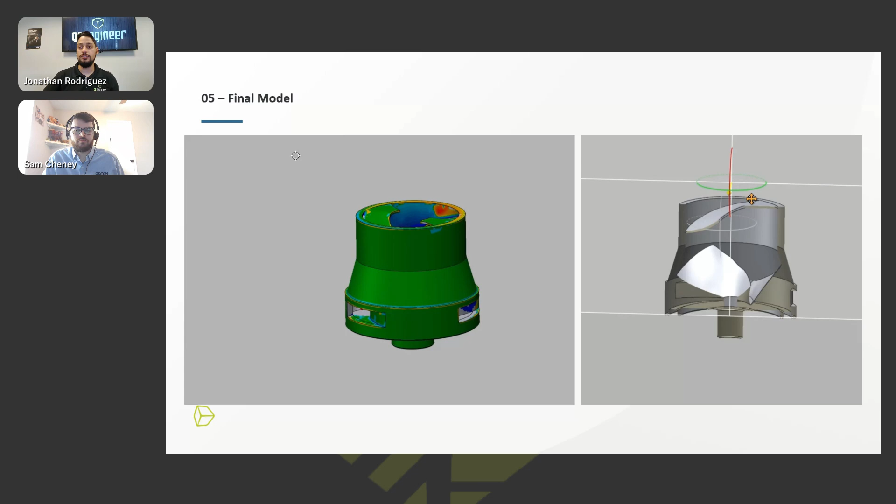Sam and I spent an absurd amount of time talking about this project over the past couple of weeks, working with Alex, working with Guy at Octon and a few others. So this was a fun project. What are some of the things we had to keep in mind and think about? One of them was alignment. So we talked about that keyway. This thing on the outside is completely symmetrical. There's no left side, there's no right side, front, back, nothing. So capturing that keyway was crucial to give us some direction. And so I wanted to make sure to capture that with the silicone.

The other part of it is that there are many different ways to make a mold of this, and you have to decide on the one that makes sense. So in the beginning, I showed using that thickener with, I think it's Dragon Skin 10 that I ended up using for that. That was translucent. Can I scan it? Do I need to tint it? Do I need to add thickener? What I ended up using was actually called Rebound 25.

And what was nice about it was it actually has this property called thixotropic. Sam and I did not know what this word was. We love this word now. Now we're going to expound stories with our friends about thixotropic. What it is, is that it has a mixed viscosity.

So you can actually brush this on and it holds to those vertical walls really well. It holds to the top of those vanes really well. Both of these are the same amount of silicone. One is Rebound, the orange, where it's captured the sidewalls, it's captured the top of the vanes, everything I wanted to capture. This one was without any thickener, and it just drained to the bottom. So it basically filled. It created a block at the bottom of my part. So there's something to keep in mind.